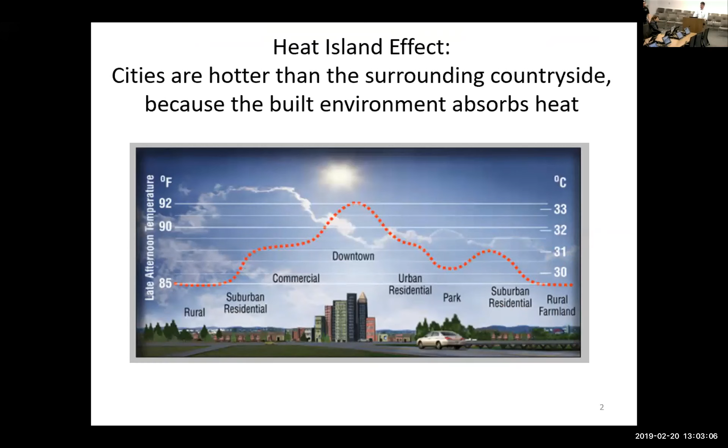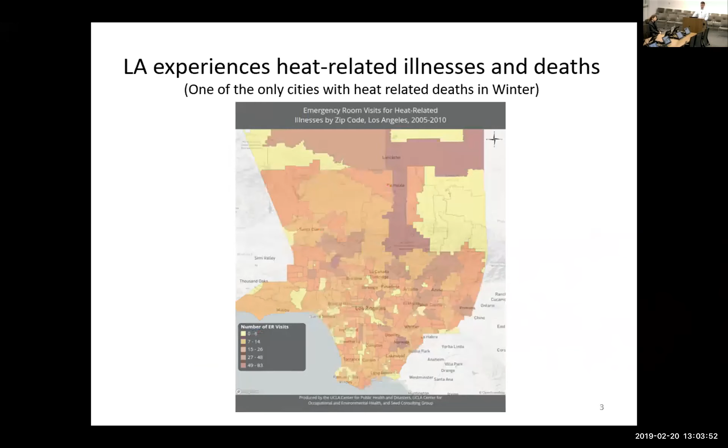One of the interesting things about urban cooling is it's not just about reduced carbon emissions from reducing air conditioning usage. It also has to do with life and death. LA experiences heat-related illnesses and deaths, and we're one of the only cities in the United States that has heat-related deaths in the winter. We can have a warm spell in January—not this January, we didn't—but we can have a warm spell that catches people by surprise. It gets up to 95 degrees, and vulnerable populations such as the elderly or other people with certain health conditions aren't prepared.

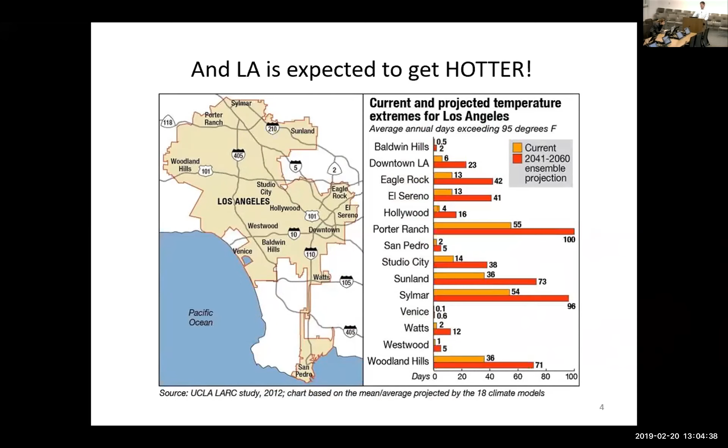Porter Ranch already has 55 days exceeding 95 degrees, and Sylmar has 54. As you can see, that's expected to almost double in the 2041 to 2060 timeframe. So we're talking about a future environment for the city where maybe a third of the days of the year are 95 degrees and above in our hottest neighborhoods.

There's a number of strategies you can use to reduce the heat island effect, and three of them that are very important are shade trees, both on public property and private property; cool roofs, which are different types of roofing where instead of the building absorbing the sun's heat, it reflects some of that back as light into the atmosphere; and cool pavement, which is the topic we're going to explore today.

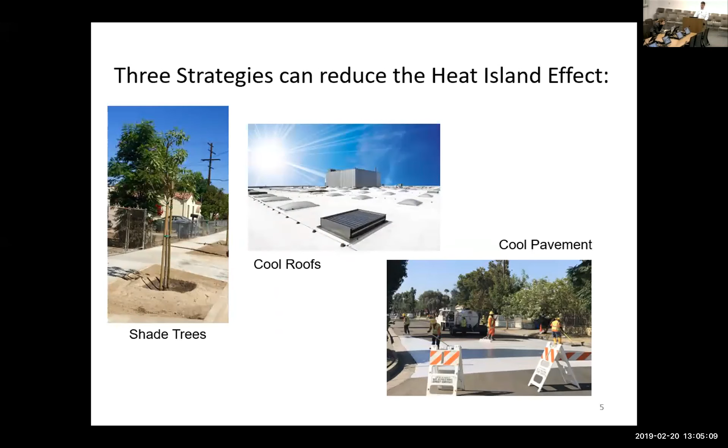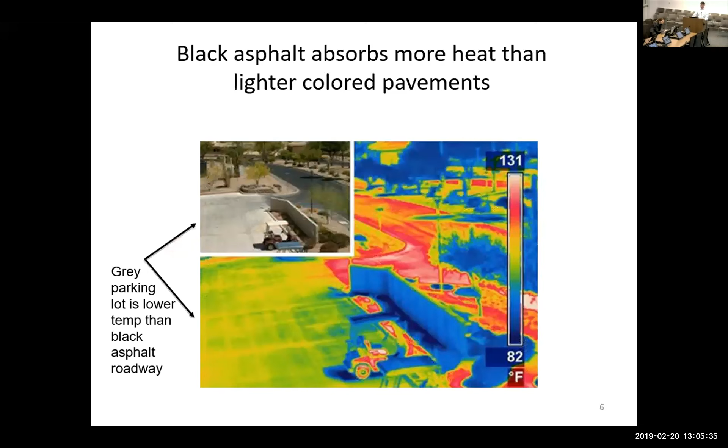What we wanted to do was explore whether some type of lighter colored paving surface would reduce the amount of heat capture by the roadway. When we started this process, we couldn't find a single example of a public street in California that had received any kind of cool pavement treatment.

The only cool pavement treatments we could find were in off-street parking for commercial office buildings seeking LEED points, seeking sustainability points. So we set out to see if we could be the first municipality in California to put a cool pavement coating on a public street.

But before we did that, we wanted to make sure it was safe. So we went looking for a vendor and found one called Guard Top that had a product called Cool Seal. They had a thin sealant made in about a half a dozen colors, and they were often selling it for use on school playgrounds, to make asphalt basketball courts look more appealing with different colors. They found that the gray color actually had a cooling effect, and started marketing it as a cool pavement coating, but they hadn't yet put it on a public street.

We're lucky in the city of LA, we're large enough that we have our own materials testing lab, operated by one of our sister departments, the General Services Department. So we had the lab test the material, and it passed the wet traction tests and some basic durability tests.

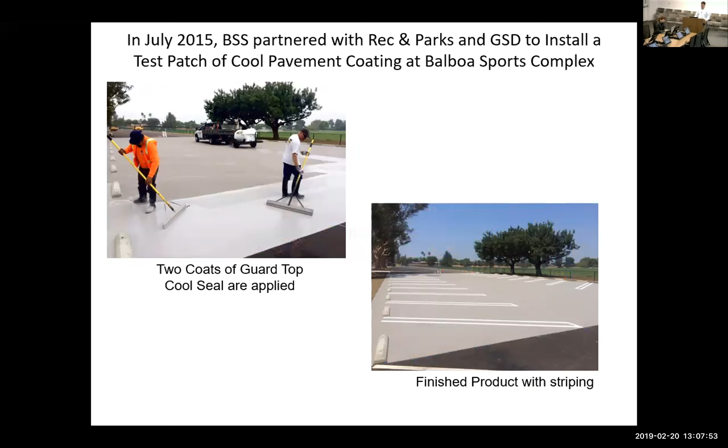We found that both in the lab and in this field test, the material passed the wet traction tests for vehicles and for walking. Also, in summer afternoons, the coated area was approximately 10 Fahrenheit degrees cooler than untreated black asphalt across the median. We liked this particular location because that median in the middle made sure there wasn't heat transfer across the asphalt from the coated area on the right to the uncoated area on the left. So we thought 10 degrees was pretty good.

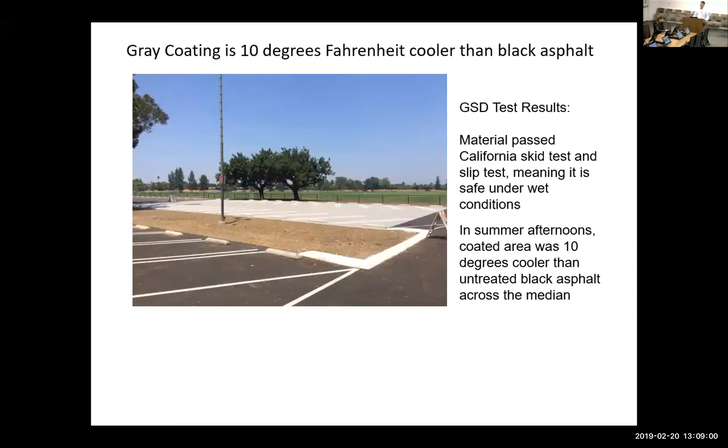One thing we noticed is the temperature differential kept growing as the day went on. On a hot summer day, the differential would go from 1 degree to 3 to 5 to 8 to 10, and even 12 degrees by the 3 or 4 o'clock hour. That could turn out to be significant, because people come home from work around 5 or 6 o'clock in the summer, and all the hardscape around their home has absorbed all this heat. Then that heat starts to dissipate into the evening. So right when they want to cool down their house, all the hardscape around it is giving off heat at that time. This is something that might mitigate that.

Our next step was to go to the mayor and council and obtain funding to actually do a pilot project on city streets. We got about $150,000 worth of funding, which was enough to coat one city block in each of the 15 council districts that comprise Los Angeles.

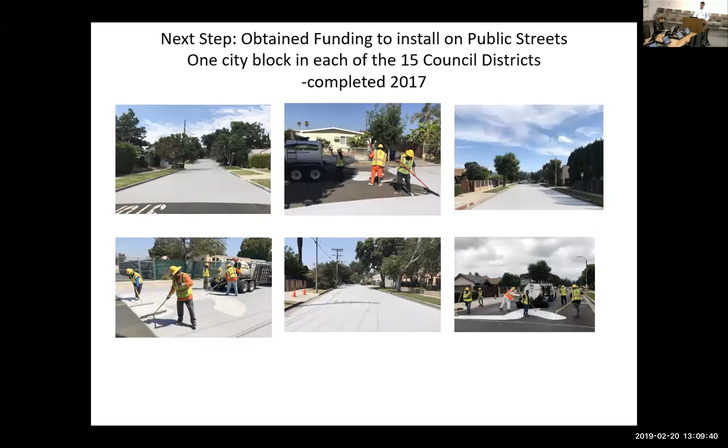So did the press. We were really surprised to see national and international coverage. We were covered in the Los Angeles Times, the New York Times, the Washington Post. And then Agence France-Presse came out, which is the French... what do you call that?

It's like the Associated Press in France. They shot a video, and that caused us to get stories and videos in 10 different languages. We received a lot of inquiries from cities in the United States and from Australia, New Zealand, and Europe.

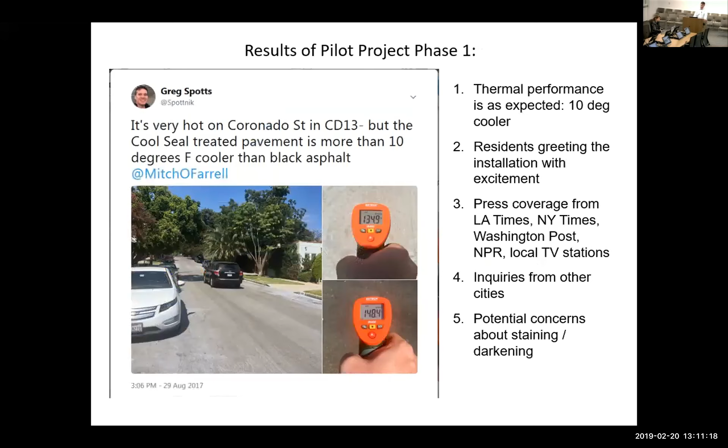One of the things everyone was asking us, and we were interested in too, is concerns about staining or darkening. The public street is a very dirty and harsh environment, and anytime you put a lighter color out there, it's going to show stains. We were wondering whether the neighbors would be concerned by that staining, and also wondering whether, if the material darkened, the temperature differential would start to reduce over time.

We did find that in some of our locations, one year later, when we got to the second summer, the temperature differential had decreased by a few degrees in the locations that had darkened up the most. So the vendor decided they would reapply the material in some locations with a slightly revised formulation. They went back over the winter and came up with a formulation they thought would stand up to both the material being abraded or eroded off, and also to stains.

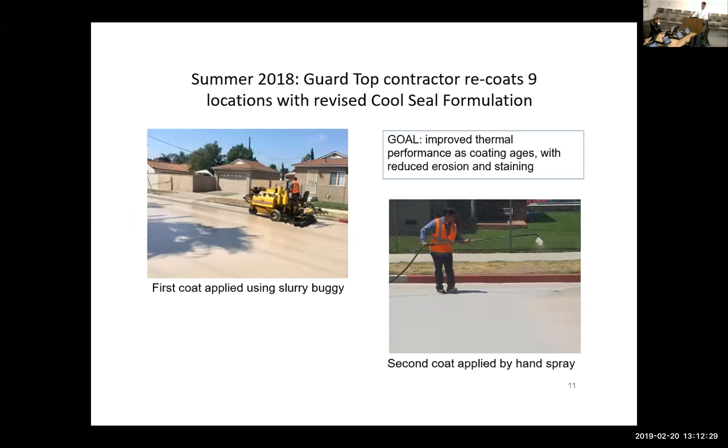So we have several different next steps we're pursuing at the same time. We took our learnings from this project and applied for a new urban cooling planning grant through SB1, and we won that grant. We've engaged a consultant to begin a community-driven process to identify a multifaceted urban cooling project around the Sherman Way station for the Metro Orange Line, the express busway in the valley. This is a very hot area of town.

We collaborated with Councilmember Blumenfield, and the community is going to tell us what they think they need to be able to bike or walk to that transit stop without getting too hot. So that may involve cool surfaces, cool roofs, shade structures, any number of things. The grant will enable us to fund the planning, but then we'll have to go seek funding for implementation.

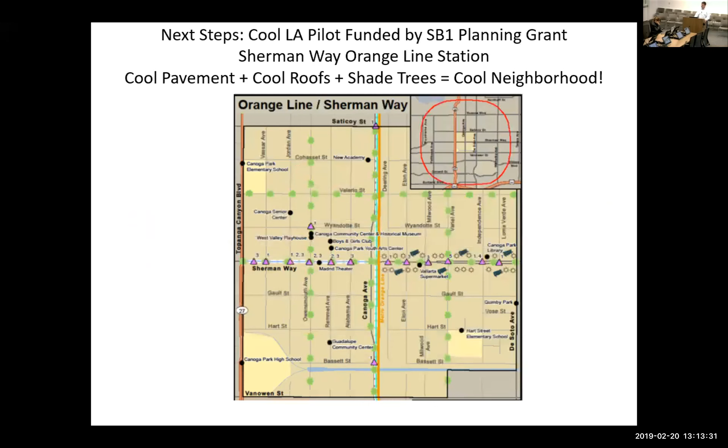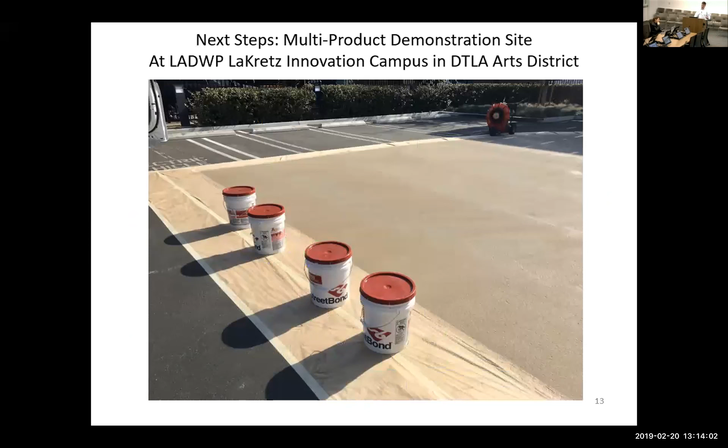Another next step we're in the middle of is we partnered with the LA Clean Tech Incubator at the La Kretz Innovation Campus in the Arts District in downtown LA. Currently there are 4 different products being installed on the parking lot to see how those products work out. We're hopeful that we may identify additional products we might want to try on the public street through this partnership with the non-profit here, who did a call for products to turn us on to some additional products beyond the first one we used.

We're getting ready in late spring to do our first neighborhood-level urban cooling project, where we coat all the streets in a small subdivision. Say we coat 10 to 15 city blocks, all contiguous, and maybe we'll see a neighborhood-level cooling effect that would be more substantial than just coating one city block in each council district. So those are the next steps we're taking.

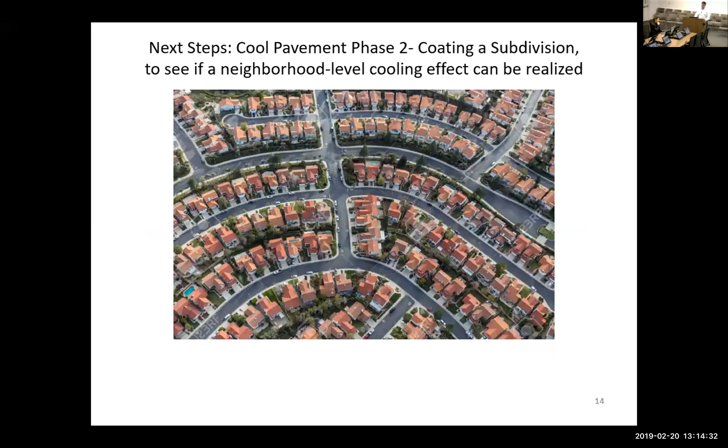Another one under consideration, but a little beyond the scope of our department, is Metro planning a long asphalt bike and pedestrian path on what used to be railroad tracks along Slauson Avenue in South LA. It's called Rail to River. There's some discussion about the possibility of coating that bike and pedestrian path with cool pavement coating, which could be very nice because it could actually make the path more livable and enjoyable for pedestrians and cyclists on hot summer days.